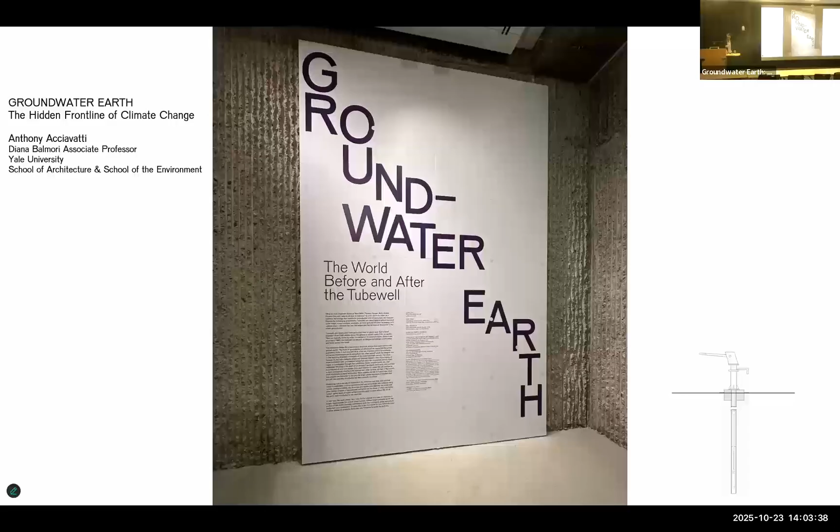As Professor Lal was mentioning, I've spent quite a bit of time doing research in India, across South Asia increasingly, but especially in India, and I'm going to connect it to your backyard here in Arizona as it relates to questions of groundwater. And the work that I'm going to share with you this afternoon, I wanted to show just the team that's gone into making this possible, a little bit like the film credits at the beginning of a movie, because there's quite a lot of work that goes into this in terms of producing not only the drawings and scholarship, but also the exhibitions.

And part of what I do as well is exhibit this work on groundwater and the River Ganga or Ganges. So before I talk about the exhibitions that I have up currently in London, on display at the Wellcome Collection, as well as at the Venice Architecture Biennale, which all of this is part of that work, and why I came to organize an exhibition really around these core samples that I'll tell you a little bit more about, and why I hang them over mirrors.

I'd like to begin with 3 measurements: 80 centimeters, 979 cubic kilometers, and 99%. 80 centimeters is how much the tilt of the Earth has shifted between 1993 and 2010 because of how much groundwater we've extracted from it. 979 cubic kilometers is how much groundwater was extracted in 2018. That's a little over 2 Lake Eries in terms of the amount of water that's taken out. And 99%: groundwater accounts for 99% of the liquid freshwater stock on Earth and is the world's most accessed freshwater reservoir.

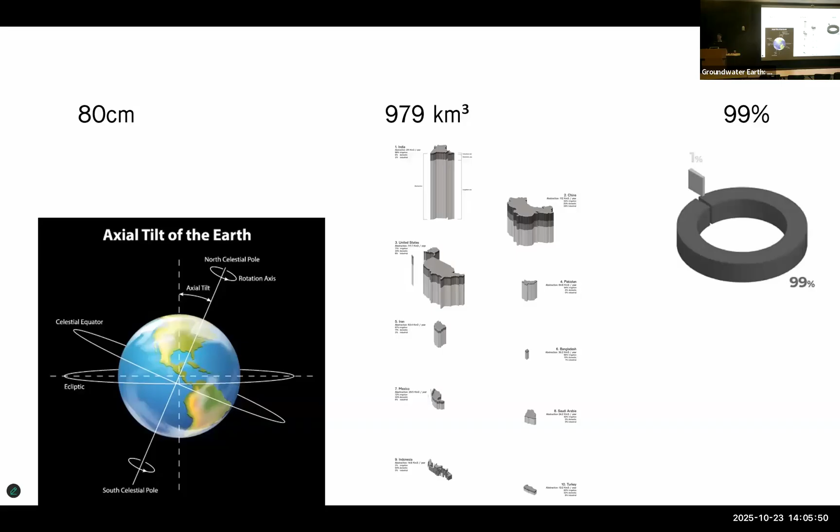And I share this with you because for me, we live in the groundwater age. Groundwater is integral not only to agriculture, but cities and for drinking water. And the work that I'm going to share with you tonight especially focuses on two of the largest places of groundwater extraction, which happens to be India, which consumes more groundwater than the People's Republic of China and the US combined. And then Pakistan comes in fourth. So South Asia, and particularly Asia, is one of the largest consumers of groundwater in the world. And here I'm breaking it down in terms of industrial uses, domestic consumption, and irrigation.

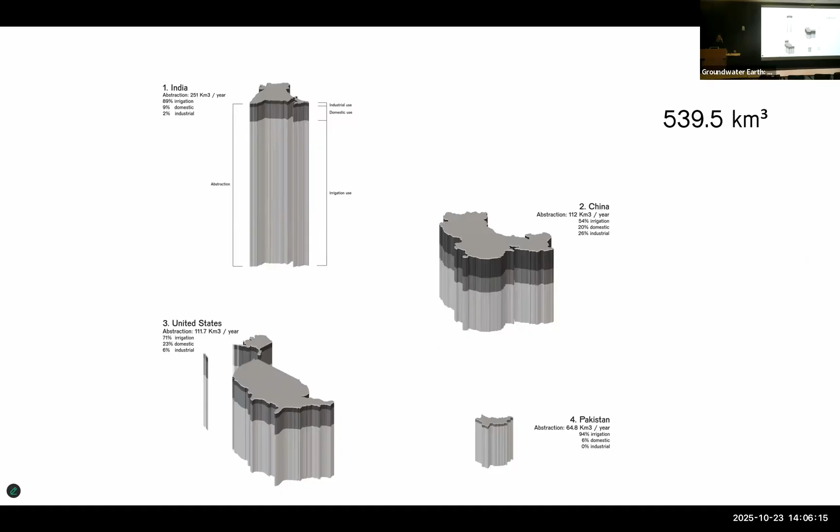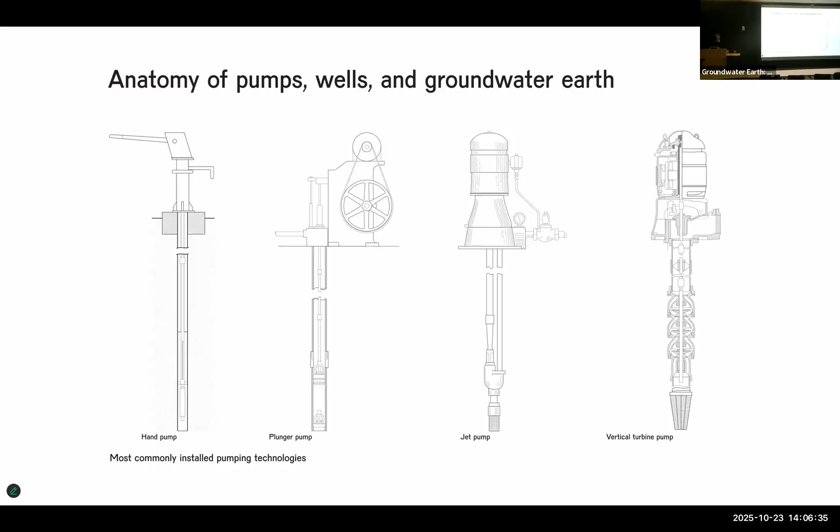And the fulcrum, as it were, that's allowed for this shift to happen and for so much groundwater to be taken out are these things known as tube wells and hand pumps. And it's millions of these instruments that have shifted the tilt of the earth and allow for so much groundwater to be extracted on a daily basis.

And tube wells and hand pumps are commonly used in places where municipal water supply is non-existent, unreliable, or often polluted. These are minor technologies with a global reach. They tap into one of the largest masses of fresh water on the planet, aquifers. And as you can see here, they do so in a variety of ways with different depths, volumes of abstraction and extraction.

And tube wells are typically constructed from perforated steel or plastic pipe, even sometimes bamboo, that's bored anywhere between 1.5 meters and 300 to 400 meters below grade. And they're typically driven by either an electric or diesel-powered engine. And once the water is extracted, it might be consumed at the surface by people, like here, outside of New Delhi. You can see a diesel tube being used.

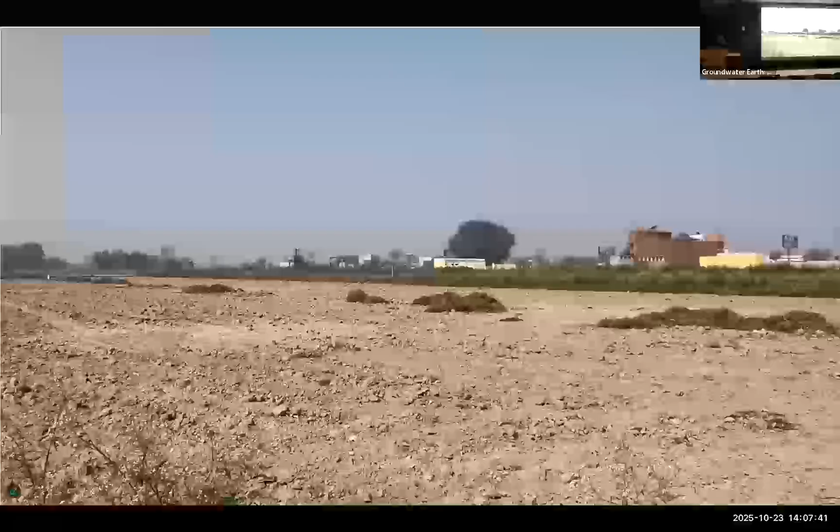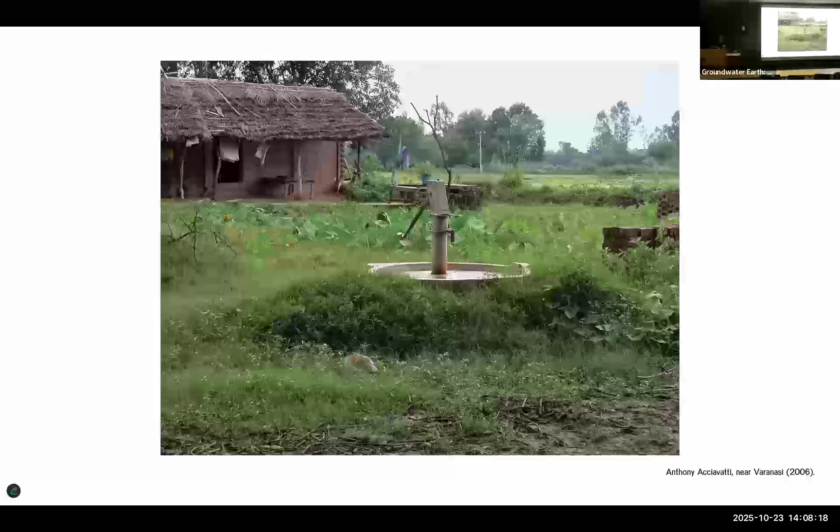You can find cast iron pumps outfitted like this one, unironically with a plastic water bottle attached to it. And certainly in urban environments as well, like this instance of one in Kanpur. So you can see the ways in which it brings animal husbandry together, urbanization. It's used for drinking water, for both water buffalo and people, also for washing clothes. And it might even be distributed like in water tanks, as you see here, which is increasingly being done across the subcontinent and in many other parts of the world as well.

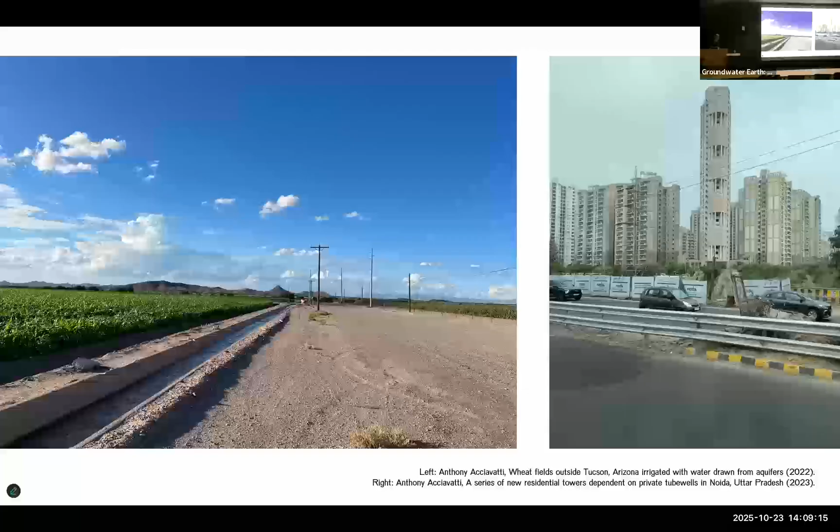And today, nearly half the global population drinks groundwater on a daily basis, and over half of all agriculture is irrigated with it. These devices, as I'll share with you, have allowed billions of people to thrive, but today they threaten to bleed portions of the earth dry. And my contention is the following, that groundwater extraction technologies are as significant to farms and cities as the elevator was to Manhattan in the first half of the 20th century.

And while this has largely been reported as a catastrophe in the making by the media, I'm just going to share a few screenshots from the New York Times about everything from, say, the East Coast sinking to America using up its groundwater like there's no tomorrow. This one kind of surprised me, groundwater being used for chicken wings and pizzas.

Certainly the uncharted waters and those with power thwarting conservation efforts, to policies put in place, like here in Arizona, to attempt to balance urban growth and the availability of water in the face of scarcity and uncertainty, to looking at how, say, Meta's data centers require so much water to keep them cool that they are rapidly depleting aquifers, to looking at where groundwater levels are falling and rising globally, all of which is critical and important. But I would say most of this is not focused on how this plays itself out spatially.

So this afternoon, I'm going to largely speak about understanding hand pumps and tube wells, along with their owners and users, as reshaping space, both agriculture and cities. And I've weighed in on this in my own way a few years back when I penned an op-ed on the need to consider space and time as factors for replenishing aquifers, for urban growth and agricultural production, with, again, a focus on shaping space.

And my work certainly builds on a body of scholarship that ranges from, say, B.D. Dhawan's work in the 1970s to Dubash's work on tubewell capitalism and the formation of institutions around this, mostly in the context of Gujarat and Western India, to rural economists like Tushar Shah, who looks at the ways in which tube wells redefine social systems, mostly in South Asia,

to Arid Empire by Natalie Koch, who I believe will be speaking tomorrow here at the university, and the ways in which we have technological transfer between, say, the state of Arizona and Saudi Arabia. And I've been, in effect, writing for some time now and published bits of it, a biography of the tube well.

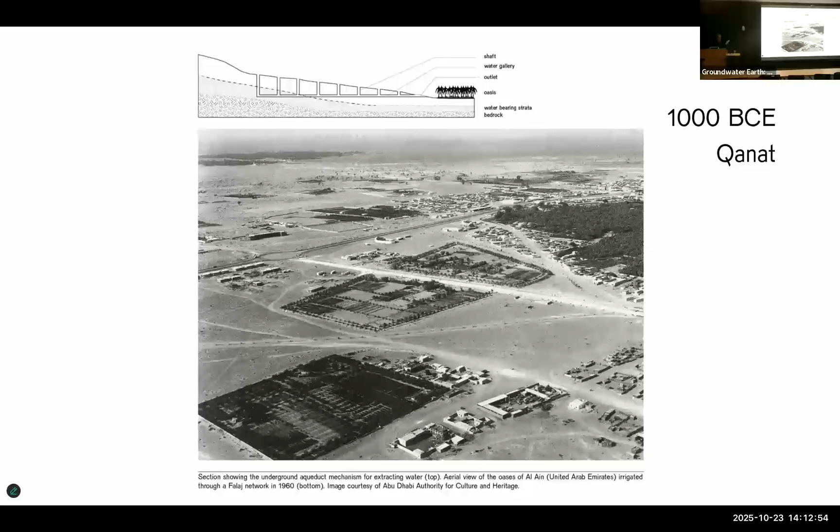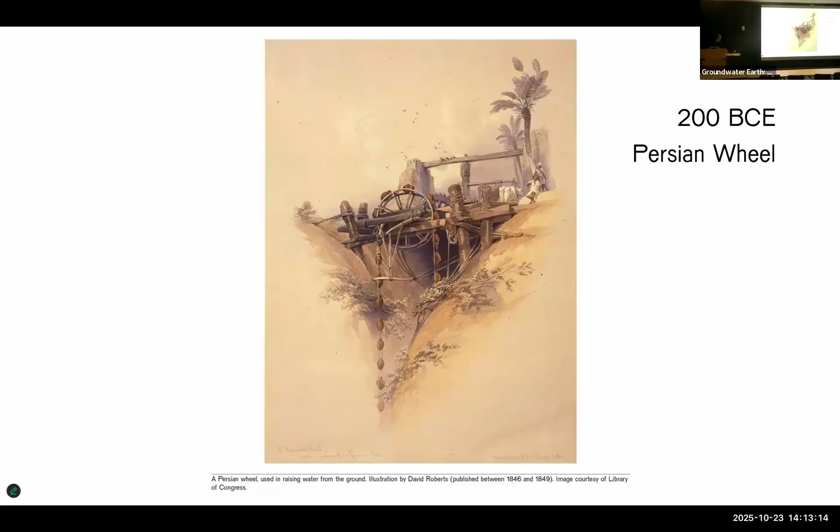To say the Persian wheel, which most likely came to the subcontinent over 700 years ago, but was developed in 200 BCE as a way of drawing up groundwater using a bullock to pull up water with the Persian wheel that you see here to irrigate crops. And certainly we find even still to this day Persian wheels and mots like you see here to, again, draw up groundwater.

And the portability of the tube well, coupled with industrialization in the 19th and 20th centuries, along with the murky codification of groundwater rights here in the Americas and Asia, made them well suited for military campaigns and for areas with little or no surface water bodies.

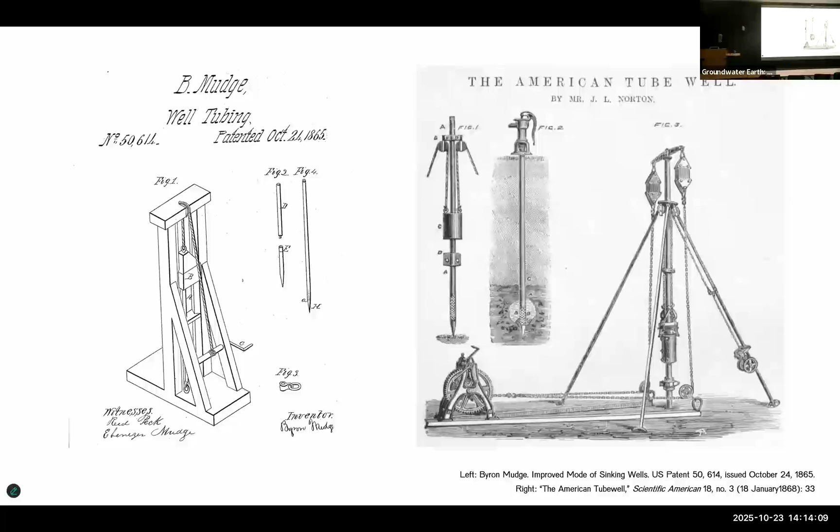And because of my interest in understanding this condition spatially and over time, I've been drawing the different kinds of configurations of pump technologies across the globe and placing them in relationship to agriculture and urban growth. So these are just kind of 10 instances of different spatial relationships to tube well technologies.

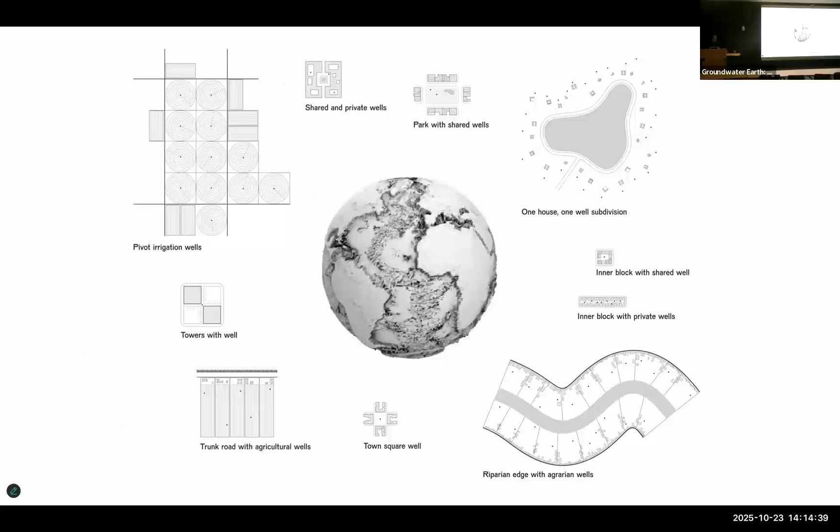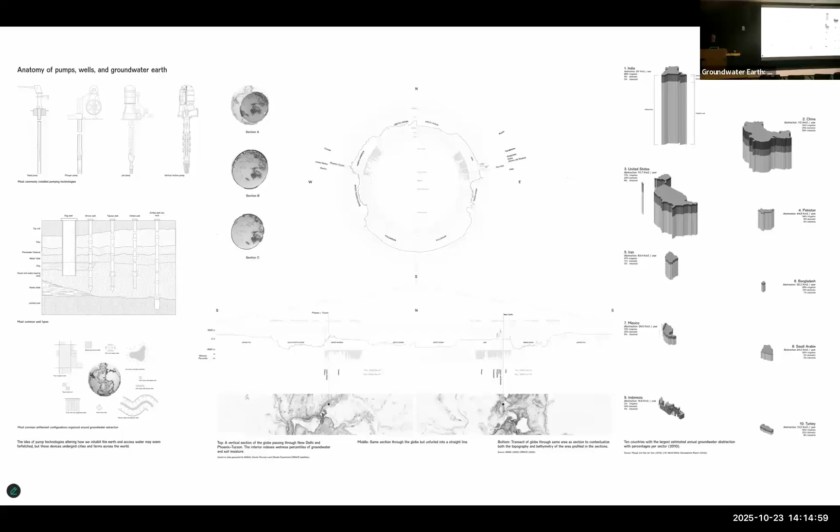Oops. And so these drawings examine tube wells and hand pumps as lenses for observing this largely invisible yet critical infrastructure that I would define as groundwater earth, which is that portion of the Earth's invisible hydrological cycle that undergirds global agricultural production and urbanization. And what do I mean by that?

Well, in 2002, the Gravity Recovery and Climate Experiment, known as GRACE, was launched. It's composed of 2 satellites orbiting the Earth, and it's really the first opportunity to directly measure groundwater changes by space. And by observing changes in the Earth's gravity field, scientists could estimate changes in the amount of water stored in a region, which causes change in gravity. And so monitoring these changes allowed scientists to visualize and calculate the size and volume of water in aquifers.

But to give you some sense of the level of resolution, most satellite imagery we get is like 30 meters to the pixel. This is 230 kilometers to the pixel. So it's incredibly low res in terms of what it provides, but it gives us a sense globally, and it's still very much used for climate modeling.

But what I'd like to do is imagine if we don't so much picture the globe in terms of its different gravitational poles or conditions, but instead, what if we were to empty the globe of its surface water bodies, a little bit like what Thomas Burnet did in the 17th century, and instead of doing it to try to show the veracity of Noah's flood, instead to better understand the relationship with topography and bathymetry.

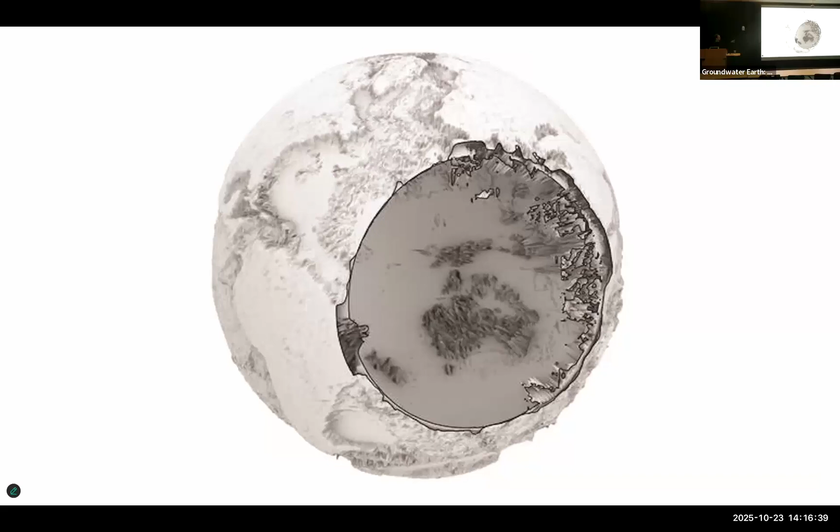If we do that with this globe, I can then take the satellite imagery that's provided by GRACE, and I can start to map out the relationship between aquifers in terms of volume and density to the topography and bathymetry of the globe, so that I can better understand this relationship between the surface and subsurface of the planet.

And this modeling took about 2 years to do just because of the double curvature. But I take sections through then 2 of the major sites of extracting groundwater, here in the Sonoran Desert and in the Indo-Gangetic Plains that you can see here on the right-hand side.

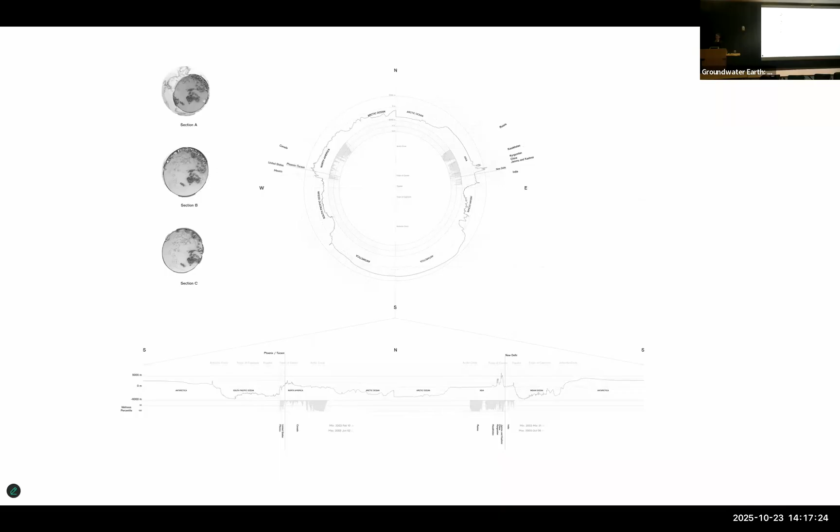And I do all of that so that I can do models like this that's currently in Venice of the Earth's aquifers, and here are North America's aquifers in relationship to the bathymetry and topography of the globe. So again, inside and outside.

And I focus on these two places that have contributed mightily to those three measurements that I mentioned to you before of 80 centimeters, 979 cubic kilometers, and 99%, which is again the Indo-Gangetic Plains and the Sonoran Desert. And this work is the outcome of nearly two decades of fieldwork and archival research, where I've moved like a sinusoidal wave between fieldwork and archival work to build these models.

And if, as the historian Swati Chattopadhyay argues, urban forms have a direct correlation with infrastructural norms, then in the absence of nature and the state, cities and towns, as well as farms and homes in the Indo-Gangetic Plains and the Sonoran Desert, share similar patterns of water extraction.

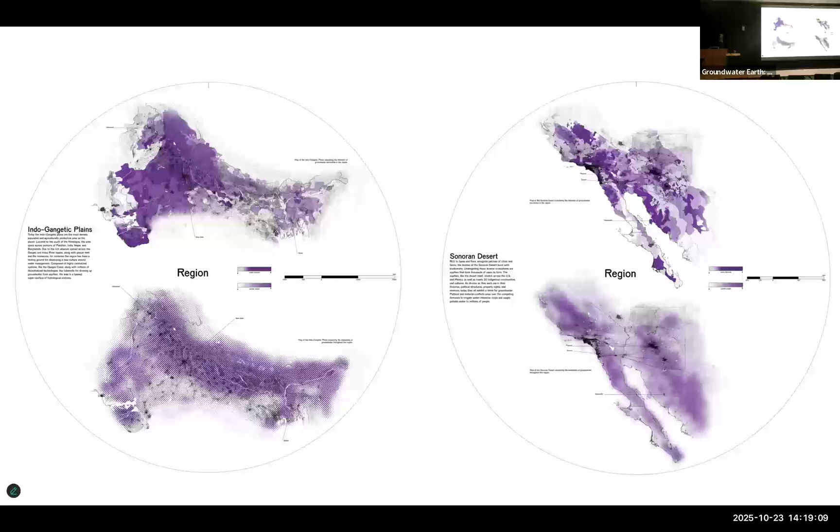As two of the world's most intensively pumped landscapes, these regions can tell us a great deal about how people use tube wells to tap into the larger global commons of groundwater resources that are not only unevenly distributed, but also unevenly accessed. And before I do that, let me fill in a little bit of the backstory to tell you why I've spent the better part of these past two decades trying to see like a mudskipper, which is pictured here. These beautiful amphibious fish can live on land for days on end.

And what's more, they move between wet and dry, hard and soft conditions. Indeed, they're mud-loving creatures that have inspired a lot of my work that I'll share with you today. And they not only move between these areas with ease, but they have evolved so that when they are above water, they see clearly like we do. Whereas when we submerge ourselves, our vision becomes wavy due to how water refracts light differently than air. But mudskippers continue to see clearly below or underwater as well as above.

And this kind of double vision can teach us a lot about how to not only reckon environmental uncertainty, but also incorporate it in our work as stewards of the built environment. And hopefully they can assist in seeing beyond barren dichotomies like hard and soft, wet and dry, land and water, groundwater and surface water.

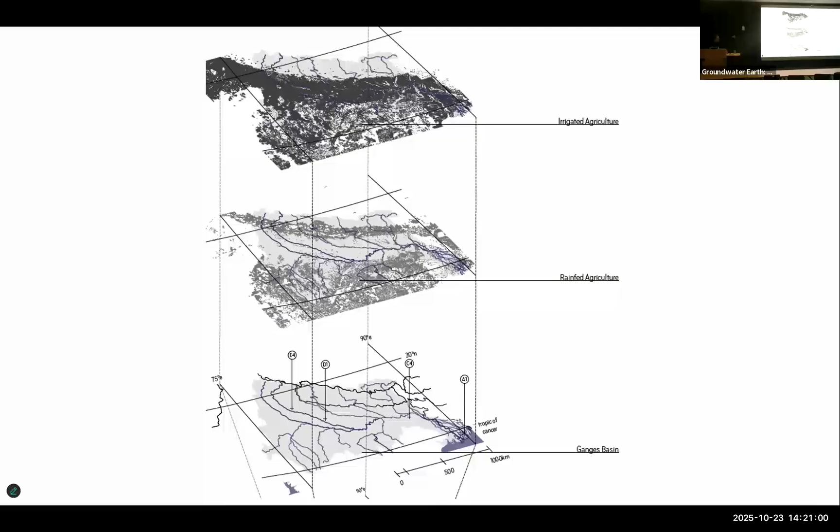So as Professor Lal had mentioned, I spent a decade seeing like a mudskipper to create a dynamic atlas of the Ganges River Basin. And I'm not going to try to shoehorn that work in tonight, but suffice it to say that the principal argument is that imagine I take the footprint of the river, the watershed, and I tilt it at 45 degrees. I then look at all of the rain-fed agriculture and all of the irrigated agriculture, like you see here. It is like a vast hydrological supersurface. There's no other part of the planet that has that continuous kind of irrigation like you see there. And so it's a hydrological machine.

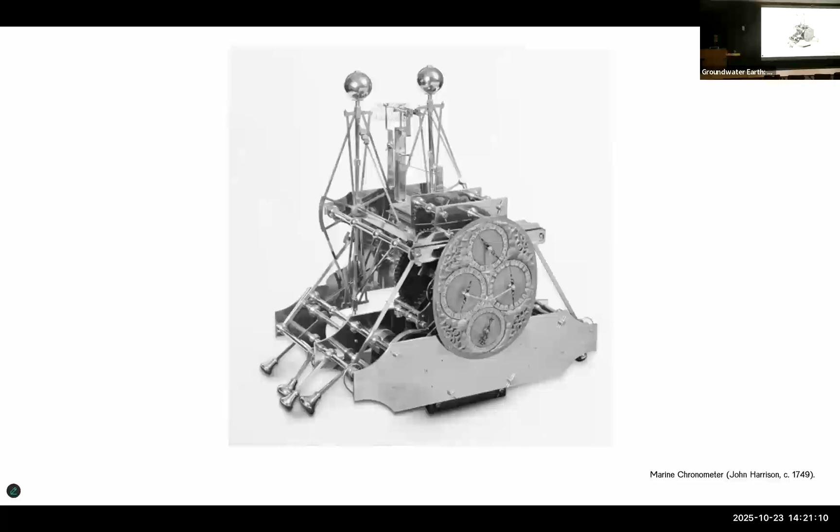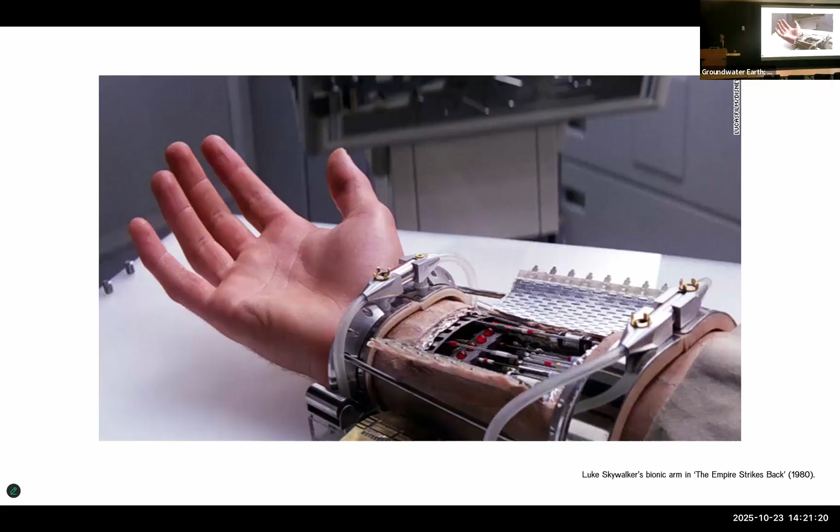But this hydrological machine is less like a device, like say a chronometer that's pictured here that was used to establish longitude. And instead, it's more like Luke Skywalker's bionic arm in The Empire Strikes Back. Is it a technology with a biology, or is it a biology with a technology? So I'll share with you some mud-loving moments that epitomize the virtues of seeing like a mudskipper, which means attending to this substance here, silt.

Ever since the subcontinent collided with Asia 50 million years ago, trillions upon trillions of tons of silt have been shed from the ever-growing Himalayas. So these tectonic crumbs, as it were, are part of the process of understanding this basin and why it's become such a space for agricultural production and groundwater extraction.

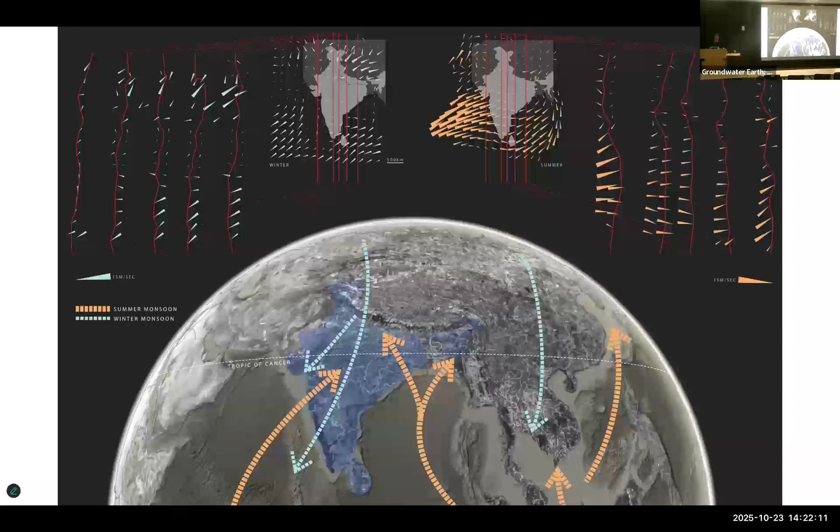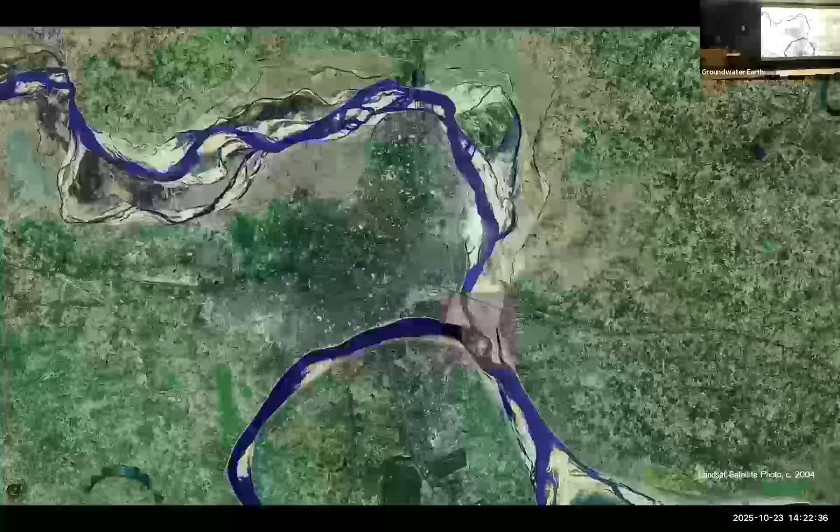And it's located at a major site for Hindu pilgrimage, as well as a major artery in terms of historic transportation. And I know it's a little hard to see here, but the waters to your right are blue and the waters to the left are brown-gray. And while this looks like it's 2 water bodies coming together, it's not.

It's 2 geological provinces coming together, because the Ganga River is fed by sediment from the Himalayas, whereas the Jamuna River, the blue, is fed by the Chambal, which has a very different sediment load. So this is what makes these 2 rivers have these 2 different colors that one finds oftentimes in the ways that they're pictured. But it's, again, the bringing together of these very different tectonic crumbs within this site, which has shaped this landscape for so many millennia.

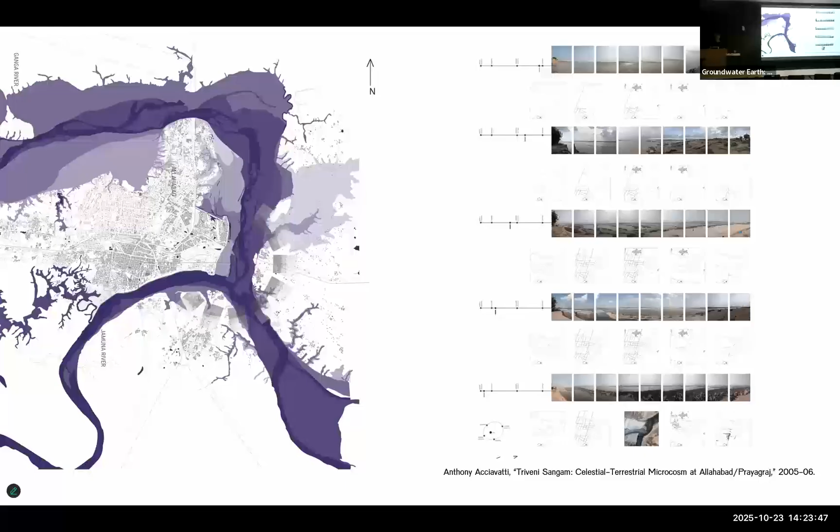And the drawings of the confluence and its environs that I'm sharing with you here combine cartography and photography to capture the cyclical rhythms of the monsoons over the course of a single year. So what I mean by this is this drawing shows how surface water bodies like riverbeds, lakes, and ponds expand and contract over the course of a single year due to the monsoons.

Observing these slow motion changes is crucial to understanding the urban form and urban life of the city and its environs. The lighter tones of violet are when the surface water bodies swell with the monsoons, and the darkest tones are at their shallowest and thinnest.

So throughout 2005 and 6, when I first moved to India, I visited the confluence every 2 weeks, where I snapped photos like you see here to create a panorama, to be able to better understand how this area goes from arid and dry to wet and gelatinous silt every year. And these panoramas complement the slow motion changes that I shared with you of those tones of violet. So where I'm documenting those things cartographically from above, here I'm doing it photographically.

And so this set of panoramas is during the month of Magh, from Magh Mela, which is a festival where 2 to 3 million people move into a temporary tent city. We have water, like plumbing, we have electricity, toilets, there's temporary hospitals. And this space is inhabited for 45 days.

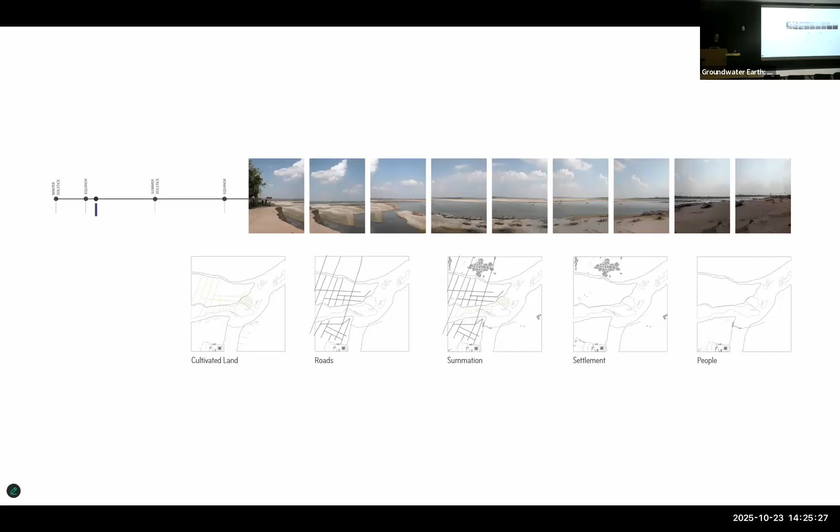But when the festival ends, the outline of the grid remains tattooed on the sandbars and shoals, and farmers move in to sow crops and harvest them. So in other words, the banks and sandbars are transformed from this hyper-dense urban to agrarian space in less than 2 weeks' time. The farmers harvest their crops. The monsoons arrive, eroding the sandbars and shores, and completely wash away the ground. This process of urban to agrarian repeats every year.

And it's definitely the most intelligent use of space that I've ever seen in terms of how people incorporate the deep rhythms of the monsoons. And here, these are then all of those panoramas and drawings put together, and they've made their way into documents like for the UN as a way that you might start to draw the biophysical, but also sacred geography, social, political layers of a city.

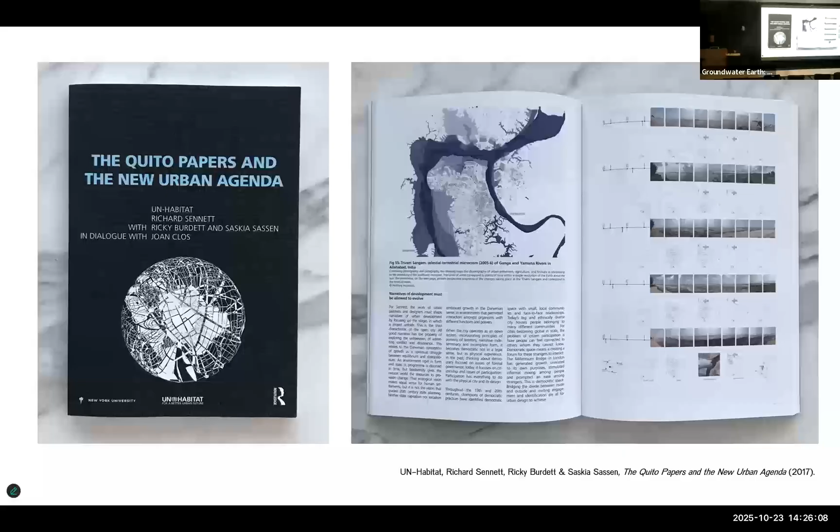So these drawing processes, I would argue, provide a blueprint for how to build on these deep rhythms of the monsoon, a process that I think more and more parts of the world would benefit from with climate change and greater environmental uncertainty.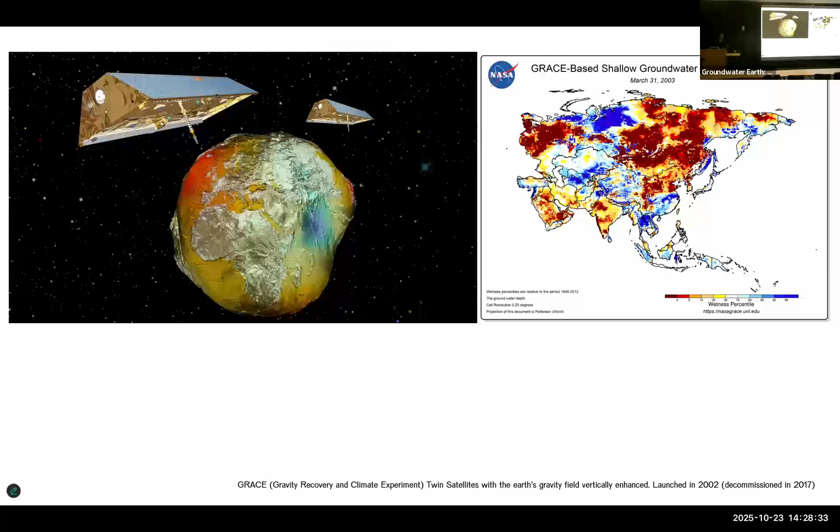Google Earth had just gone live. Drones existed, but were mostly being used by the Bush administration to surveil or assassinate people. Satellite imagery existed, as I mentioned to you before, but really low resolution. So all I had was a really clunky Garmin eTrex GPS and an even clunkier Nikon camera to try to map out this watershed.

And when I got to India, I had hoped that I would find contemporary maps. And I would ask, and these were oftentimes the best that I could find from the Survey of India, which were usually tracings of maps from the 1950s and 1960s. So effectively, it hadn't been carefully mapped or surveyed comprehensively in over half a century.

And when I would ask if I could see maps, people would oftentimes say, well, why, are you CIA? And I don't know anybody who would say they work for CIA. I certainly haven't. But so I had really no other choice if I wanted to carry out this work but to walk the land.

So I went from Gangotri Glacier, which is about 3,800 meters above sea level, through the Gangetic Plains, taking about 25,000 photographs, a near continuous panorama of it. And seeing like a mudskipper also led me to making my own instruments, which were prosthetics that I would wear.

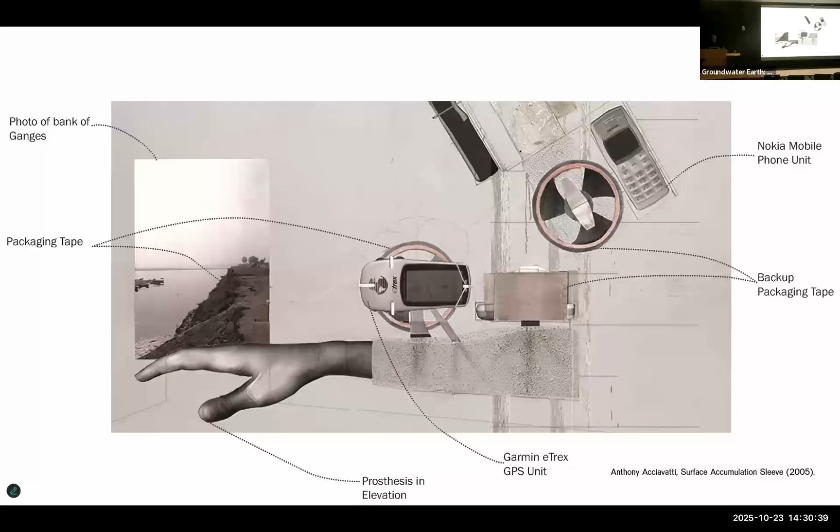So because it hadn't been mapped in half a century, I developed guerrilla tactics to measure these changes through devices like this surface accumulation sleeve, which is a prosthetic that one wears on their right arm to map soils. It's equipped with that clunky Garmin GPS system that you saw, as well as rolls of packaging tape, so that, just to say, when Spider-Man shoots his web from his wrist, I shoot packaging tape from my arm to collect soils. And I do that perpendicular to the river edge, like you see here, to collect these soils for a kilometer.

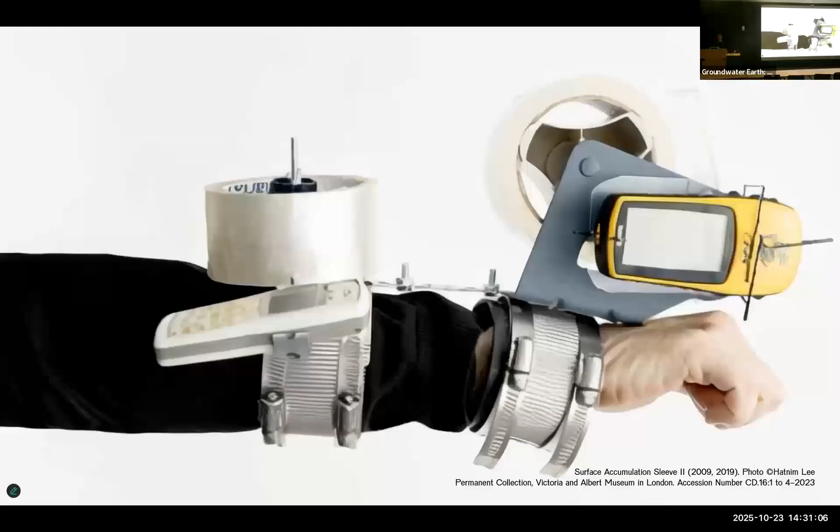And here you can see the way that I exhibit this instrument in Seoul. These are using Walking Dead figurines because they were the right scale to do these kinds of dioramas. Or here a close-up of that instrument that I made in order to do this. Using this thing in 45°C weather is quite arduous, so I developed different versions of it that were a little bit more comfortable. And also then using a kind of radio antenna as a hoe to pat down the tape.

And then even reconfiguring a child's remote control car into a surface accumulation rover, tricking it out like you see here with packaging tape, torch, camera, and a lot more to do this work of collecting soils to map out this area, which also doesn't hurt one's back as much.

Then along with these rolls of tape, which get very big and collect so many things, I also developed what I call a Ganga dip sock, where I bought 100 pairs of white cotton tube socks and would thrust them into the river all along its banks from Gangotri Glacier up in the Himalayas to the Bay of Bengal as a way to collect soils. I would then geotag them and dry them off, like you see here.

So that when I went through customs, and if I got asked, well, why do you have all these soiled socks? I would just say that I was a filthy backpacker that didn't have time to do my laundry, as a way of bringing these soils in and managed to get them past government officials to do this work.

But if I bring you back to this tape as a way of looking at the soils, the tape that, along with it being like Spider-Man's web, it's a lot like Katamari Damacy, if any of you know this PlayStation game from 2004, where small objects like spoons and paper clips adhere to this little orb for this prince that's trying to build a new galaxy or a new set of planets. And so eventually jungle gyms start to stick to this, and even entire cities collect, and city blocks and stadiums.

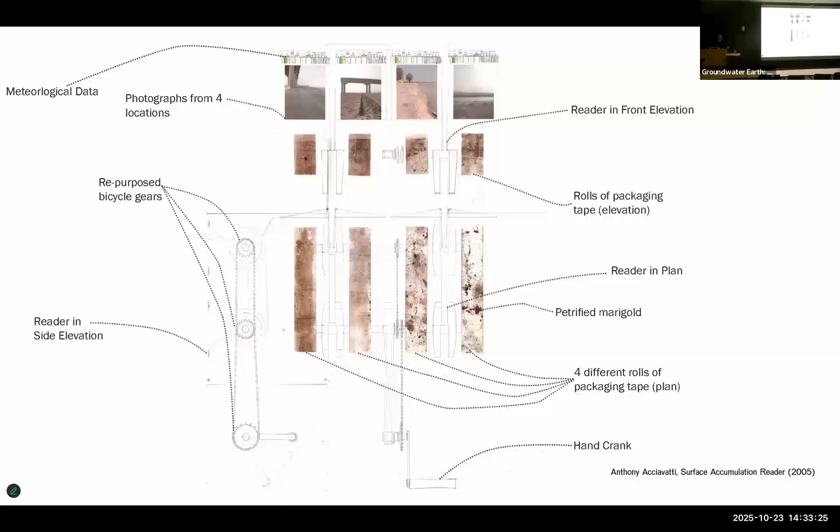Well, my strands of tape, they collect soils, but also flowers, fecal matter, plastics, auto parts, and many other things. So these artifacts from human and non-human occupation allow me to conduct an ethnography of the soil. Using the wrong thing for the right purpose defines most of my work with water, soil, and urban form. And seeing like a mudskipper then means using these devices to be able to move between the space of the laboratory and the space of the field.

And after scanning many hundreds of kilometers of packaging tape, I didn't have any instruments to analyze the soils. So I turned to that trusted Photoshop tool, the Magic Wand. Now you might use the Magic Wand to, say, digitally impose a tattoo on someone's chest. But I misused the Magic Wand tool to break down particle sizes. And here again, using the wrong thing for the right purpose allows me to make my own remote sensing device when no data is available.

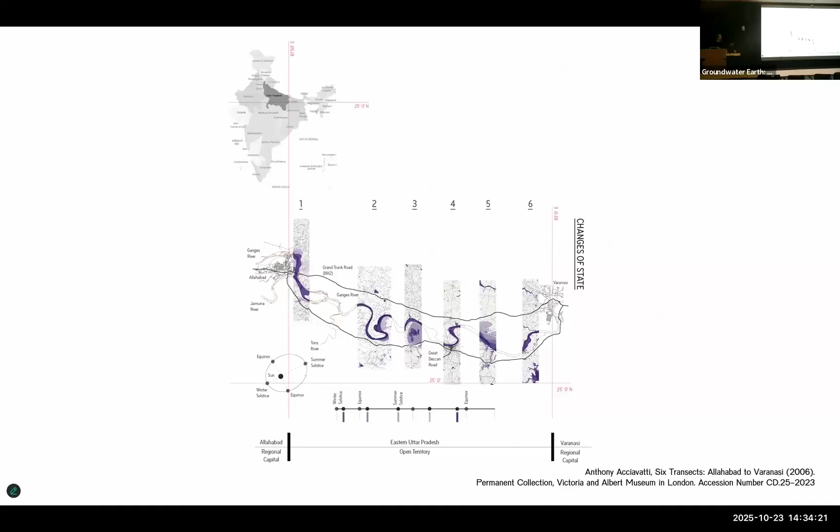So here I'm breaking down the different sediment sizes because those particle sizes tell you about the behavior of the riverbed and flood channels that I look at. And that's what then allows me to make much larger drawings of the watershed, not just of the city of Allahabad, but these transects, like you see here, where again, I'm able to plot out those tones of violet and dark violet and light violet by using these instruments.

So I always like to think of these drawings in fashion terms. If most cartographic drawings are customized, say like something you get by Christian Dior, they're like couture. Mine are more like ready to wear that you get at Uniqlo or Target because they have a seam allowance. So you can gain a few pounds, lose a few pounds, they still fit. So these drawings are not outdated by the time they're done because they take into account surface water and groundwater conditions in relationship to urban form and urban growth.

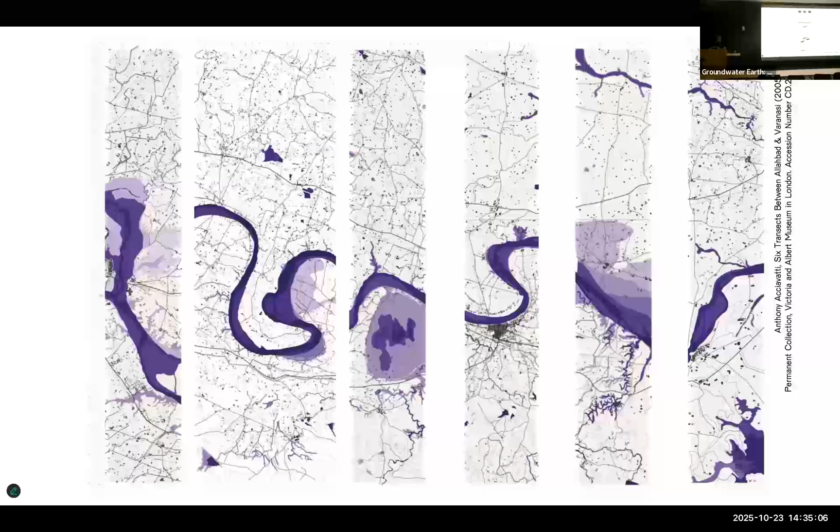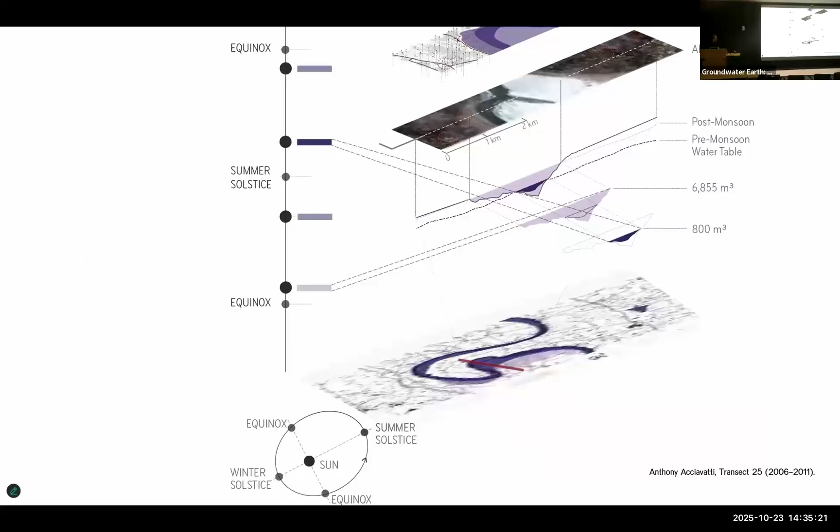And they allow me to not only then look at, say, the surface, but also subsurface. So I start to take those and understand the relationship better between the surface water in the river channel with the groundwater and aquifer, like you see here, mapping out then the different layers of water extraction by tube well, urban form, cultivation or fields, all the way to the cropping patterns that one has in different fields. So it's quite transscalar in what I can do with it.

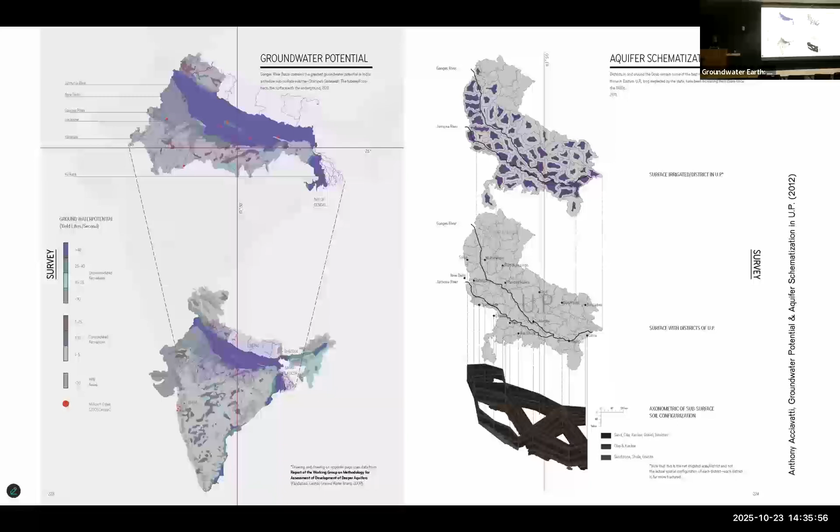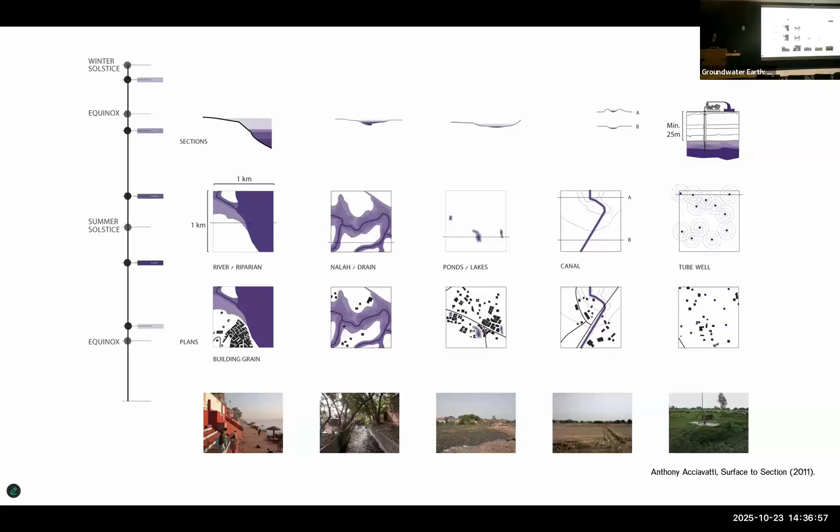And there's a reorienting that's happened across this area from thinking of the surface to the subsurface. And what I mean by that is that this is a drawing that goes from river all the way to tube well on the right-hand side. And you can see that we go from very dense to much less dense with the tube well, because the tube well allows people to effectively domesticate areas for agricultural production, but also urbanization, and not have to stick so closely to surface water conditions, whether those are rivers, canals, etc. So it allows for a diffuse kind of urbanization to take shape.

And I look at the history of the tube well in a much longer time frame that I won't go into depth about. But I think what's important to note is that this was initially developed in 1865 in the United States as a military technology, patented because there was a concern by Union soldiers that Confederate troops in the American South would poison surface water bodies.

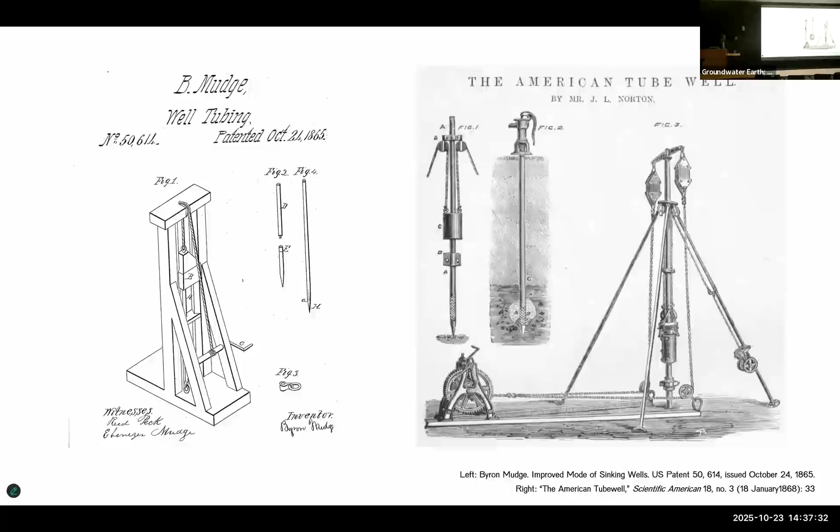So this was a military technology for drawing up groundwater. It's eventually adopted in the UK by this gentleman by the last name of Norton, who uses it for agricultural production and brings it to all of these agricultural shows in the UK. And eventually it's used in the Abyssinian desert in modern Ethiopia to draw up groundwater for a British expedition in the 1860s. And I share these moments with you because it's traveled from the US to the UK to Africa.

It eventually makes its way to the subcontinent, where it's used and then is oftentimes spoken about as the Abyssinian tube well because of its health benefits. It's not exposed to any atmospheric influences, is the way that they would describe it in the 19th century. And it gets profiled in the Lancet, Scientific American, as this scientific engineering technology.

Now, it's important, though, in the context here in Arizona, because, as many of you probably know, in 1898, there was a court case that came before the Arizona Territorial Supreme Court regarding the ownership rights to an allegedly well-defined subterranean stream that ran beneath a person's property a little bit to the north of Sedona. And the claim was that someone purchased land from someone who had been using tube wells. Their neighbors were using tube wells as well, and even drilling more tube wells.

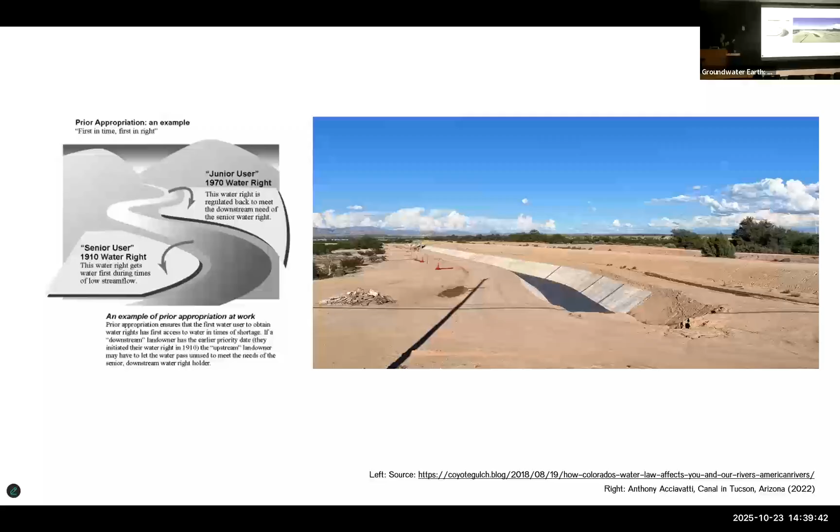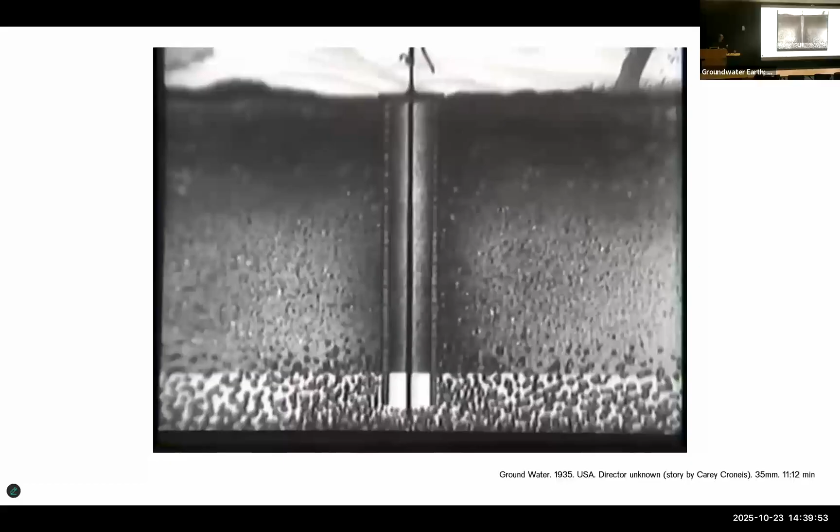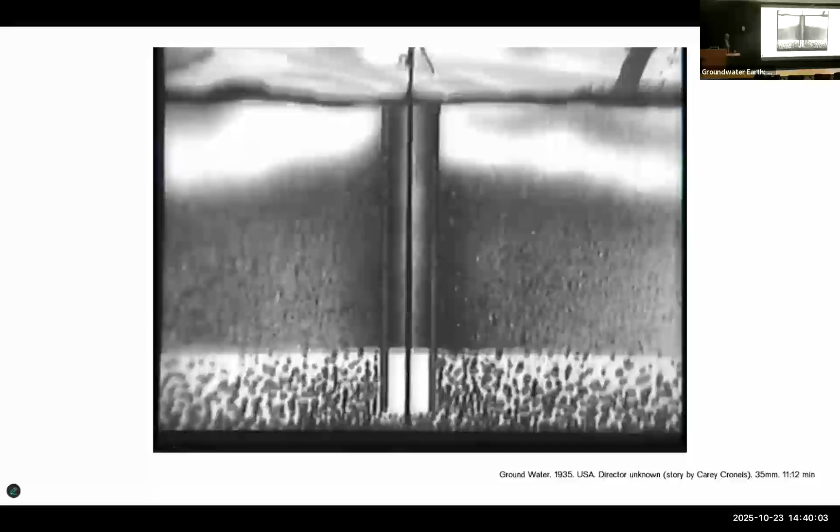And in short, the argument was that the subterranean water was the same as a surface water body. But in fact, when it goes to the Supreme Court, they uphold the decision of the Arizona Territorial Supreme Court, because what they see and what they describe is this. They say that groundwater is not recognizable like a surface water body because it percolates and oozes from the ground. It is therefore a constituent part of private and not...

As both an architect and historian of science, because that has a lot to do with how we draw and define groundwater. So this is a film from 1935, during the Great Depression, to describe the relationship between surface water and groundwater. Yeah, groundwater as being a part of property.

This is changing in other parts of the world, and certainly you obviously have your AMAs here that I'll talk about in a moment. But while Arizona is developing its system of groundwater extraction, we have the longest canal system in the world, the Ganges Canal in the Indo-Gangetic Plains. It's about 12,000 kilometers long today, with a very large central water bureaucracy. This canal system was developed in the middle of the 19th century and continues to grow even to this day.

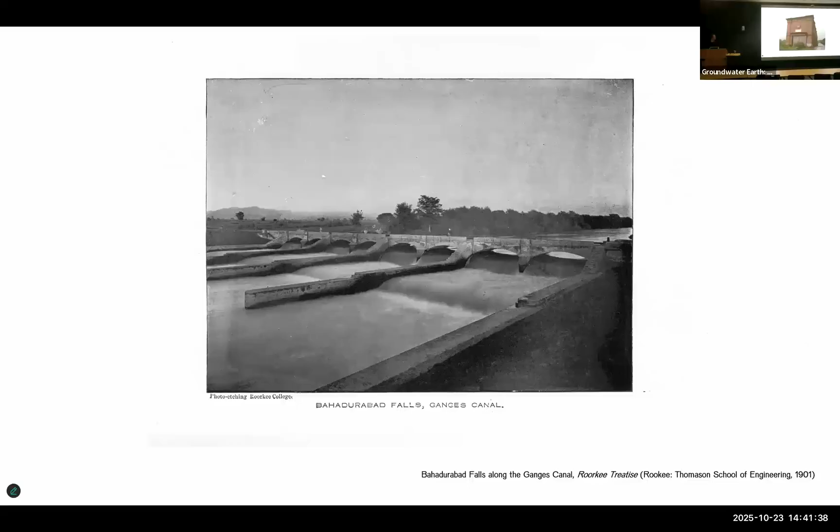But in the 1930s, the artificial falls of the canal system are outfitted with turbines to power electric-driven tube wells. And it was to power about 88 villages, about 600,000 acres with 1,500 tube wells. And these buildings still exist, mostly as sites where people scrawl their lovers' names or donkeys hang out, like you see there. But it was an attempt to bring together energy and agricultural production, to monitor and oversee agricultural production in the Indo-Gangetic Plains.

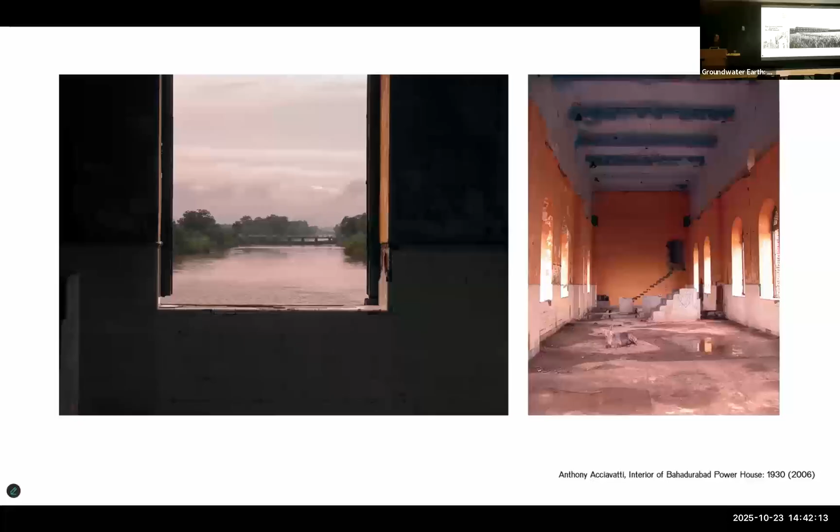But here in Arizona, you have a much longer history of this with your AMAs, or active management areas. And I'm obviously not going to be that person that comes and tells you about your place and the Groundwater Management Act of 1980. But I think suffice it to say, this civil code that develops recognizes that groundwater should be understood as something as shared as the air we breathe.

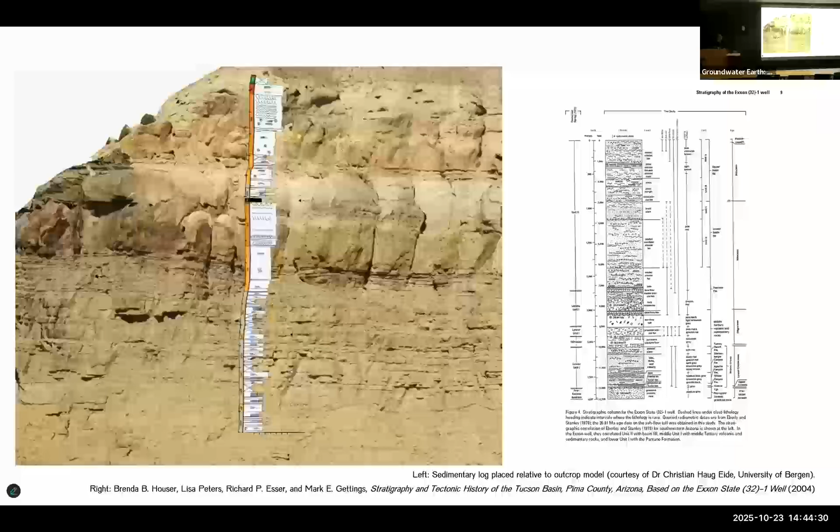Well, the work then that I do is to try to not just see in plan, but also to better understand these conditions in section. So I try to see a little bit like a geologist does in terms of the stratigraphy, like you see here. I do that as well, but I do something a little bit different.

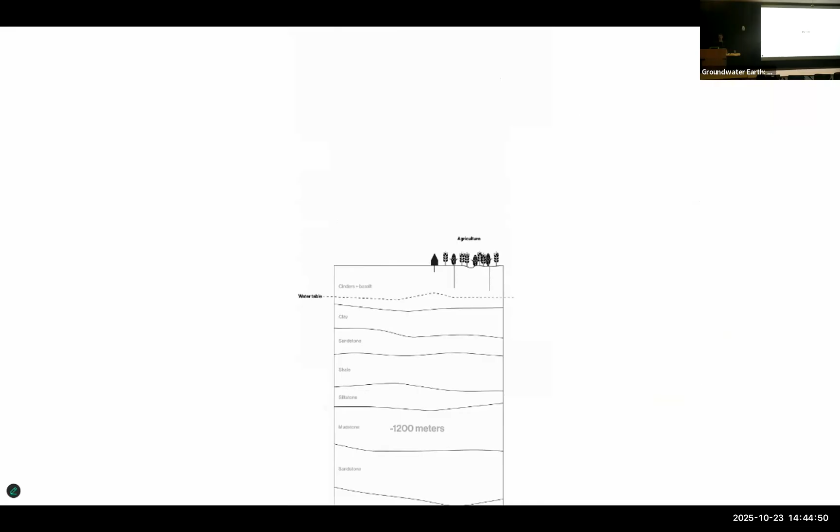Produce, but it obviously drops water table levels. You see that it then... so it's in tension, and I put mirrors underneath it, like you see here, so that we understand that this is a major protagonist in shaping how we terraform this.

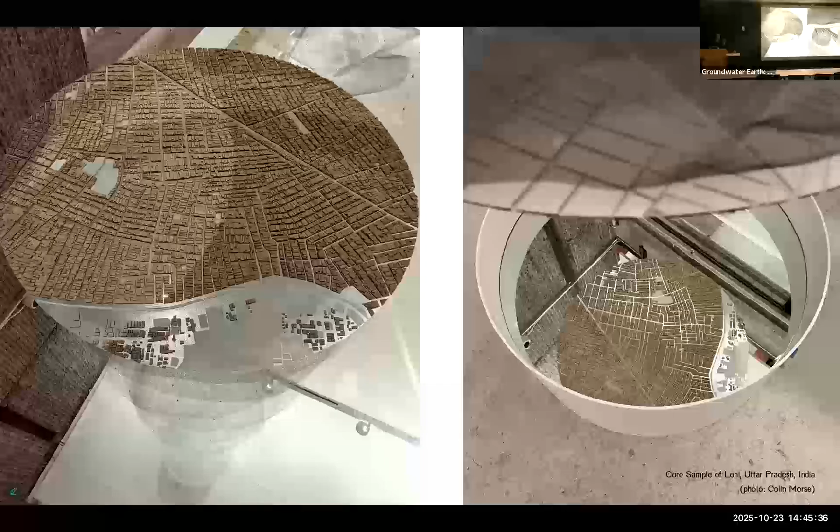So when you come to the mirrors, these things that look like Pringles here, those are those strata that you see here. When we come to the mirrors, we can see reflected in them the surface to better understand the ways in which we terraform by extracting so much from the subsurface. So you effectively look down to look up, and you look up to look down in the exhibition.

And I do that at four scales. I do that at the house scale, the neighborhood, the city, and the hinterland scales. And I do this always looking at a core sample here in the Sonoran Desert and in the Indo-Gangetic Plains.

So for instance, if I take the scale of the house, I want to share with you two houses, one that was built in Flowing Wells here in Arizona, not terribly far, just next to Tucson, and another house that was built in New Delhi around the same time. And both these houses incorporate tube wells and wastewater management as an essential domestic infrastructure. And by bringing these two technologies into the domestic sphere, the home no longer relies on any centralized water management system, and allows for a greater flexibility in terms of location.

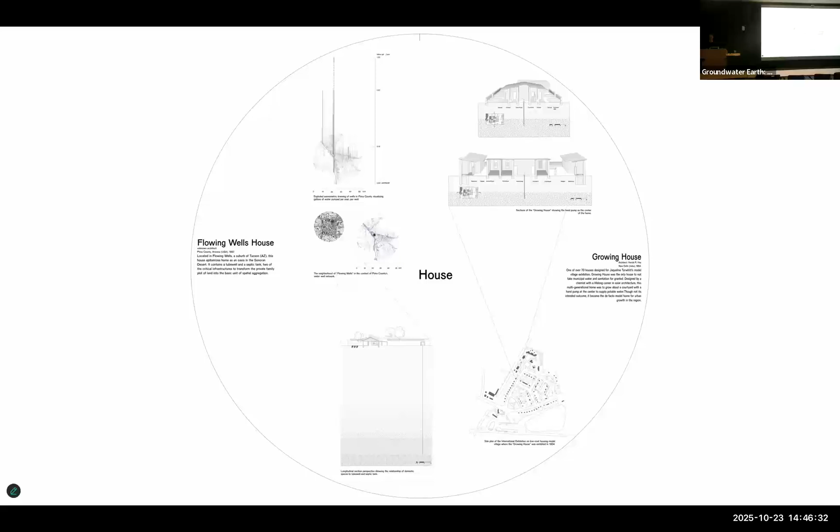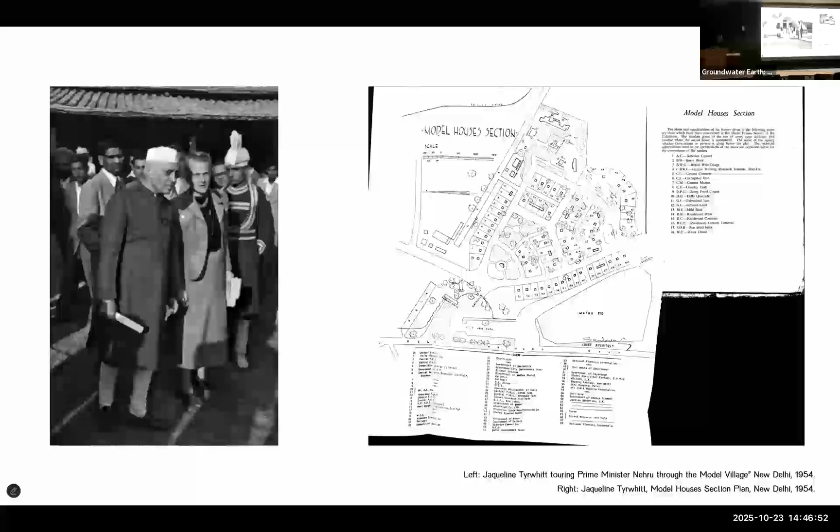So let me begin in New Delhi. This is the first Prime Minister of India, Prime Minister Nehru, and then this is Jaqueline Tyrwhitt, a South African planner who is brought in by the United Nations to design a model village. And there are over 100 model houses that are built here for this village. You know, houses like this, where you have kind of a barrel vault, or even this one that was made by the asbestos industry in India at the time.

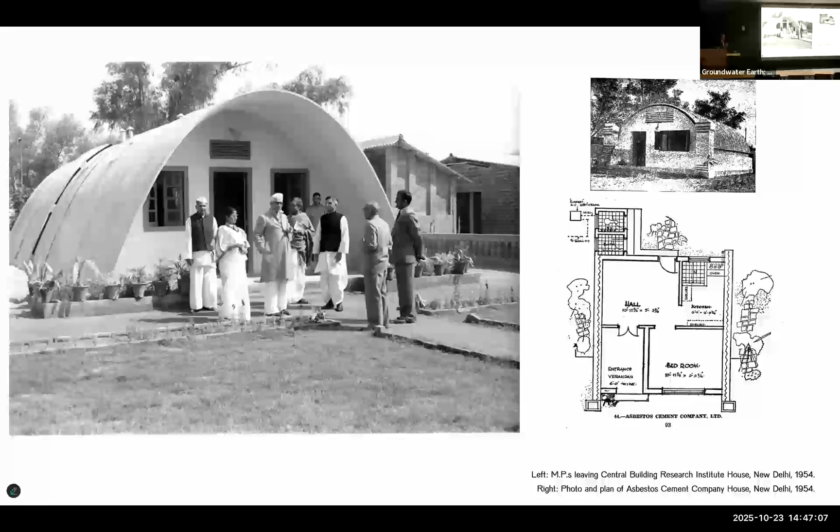But none of these houses recognize where water will come from. They all assume it will be through a municipal system, except one, which is the growing house that was designed by a chemist that worked for Monsanto for many years and then is employed by the Indian government. And he designs a house where there is a hand pump in the center, kitchens flank the house, and then we have here multi-generational family housing that develops always around this courtyard with access to the hand pump.

And so you can see in this section here how it's at the center of the house. And here it's also taken into account keeping the animal husbandry, the mangers, and the bathrooms as far away from the hand pump as possible, so you don't have wastewater infiltrating into groundwater. But effectively, it allows the builder of this house to create their own oasis.

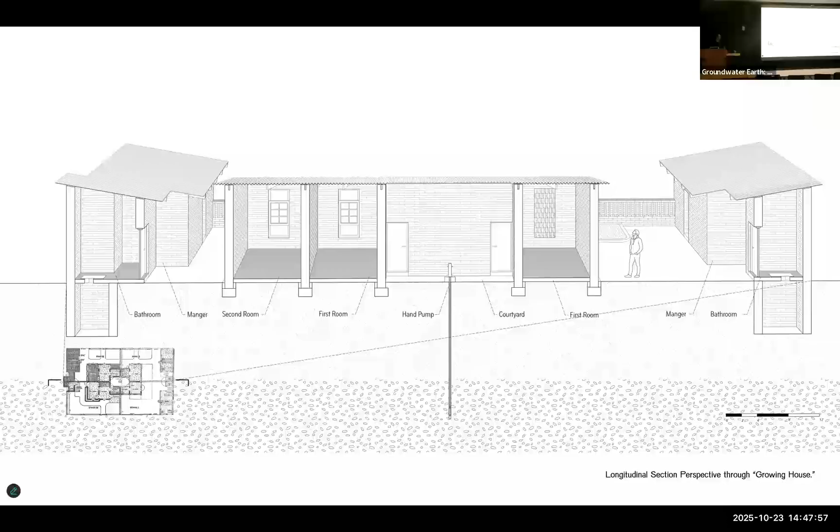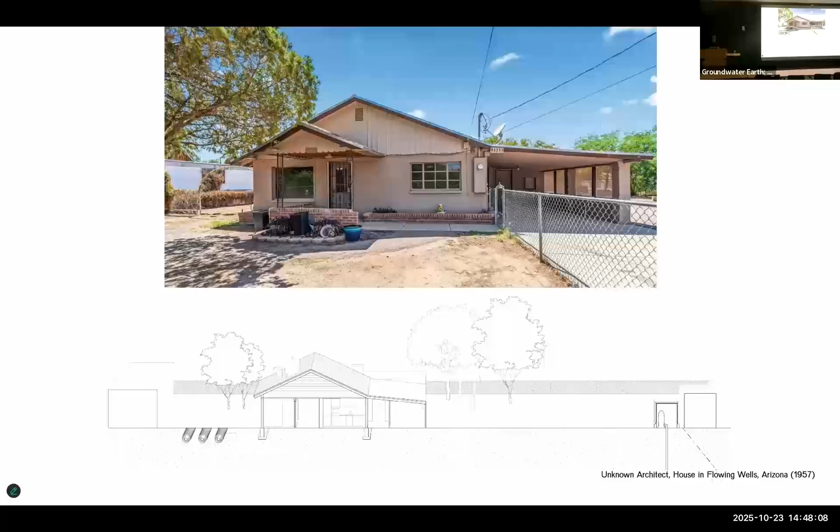Now, this same kind of pattern exists here in the Sonoran Desert. So this house that was built in Flowing Wells around the same time, in 1957, has a tube well and is outfitted with a septic tank so that it too might function as an oasis. But of course here, the tube well goes much deeper. And here you can see the septic tank within the neighborhood of Flowing Wells where it's located. So very similar patterns of spatial aggregation around the extraction of groundwater.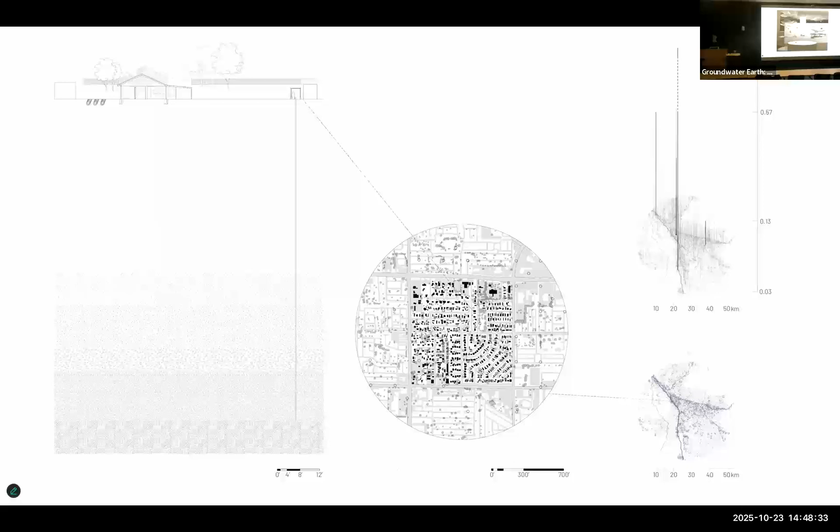And so I then hang those two models of the houses in relationship to one another to understand better groundwater here in New Delhi versus groundwater here in the Sonoran Desert.

And I do this also at the scale of the neighborhood. So of course you have Winter Haven here in Tucson, which was designed to look like Shaker Heights in Cleveland, Ohio. Has anybody ever been to Winter Haven before? There's a very big Christmas light extravaganza that happens here.

But to me, what's more amazing is that they created a neighborhood municipal water supply, a cooperative, so that they could irrigate their lawns to always be green year round. So this is the edge of Winter Haven and non-Winter Haven here, where you can see the desert floor butts up against the grass. There's obviously an aesthetic project here, but there's also a sense that this is a community shared resource.

I'm not advocating for doing this kind of lawn keeping, but at the same time that this was being developed here in Arizona, Loni, which was a town of 4,000 people in 1961, is today over 500,000 people. And it survives, originally supposed to have a similar tube well system like Winter Haven, but instead has over 14,000 hand pumps, mostly in public places along streets and open areas, to supply groundwater for drinking for these 500,000 inhabitants. But when you have so much buildup of impermeable surfaces, the groundwater level is dropping. And so we have hand pumps going dry in these areas at the neighborhood scale.

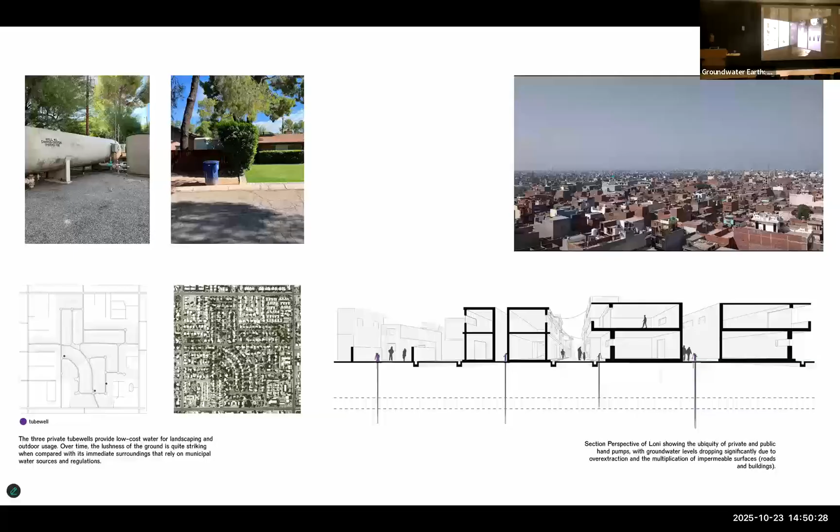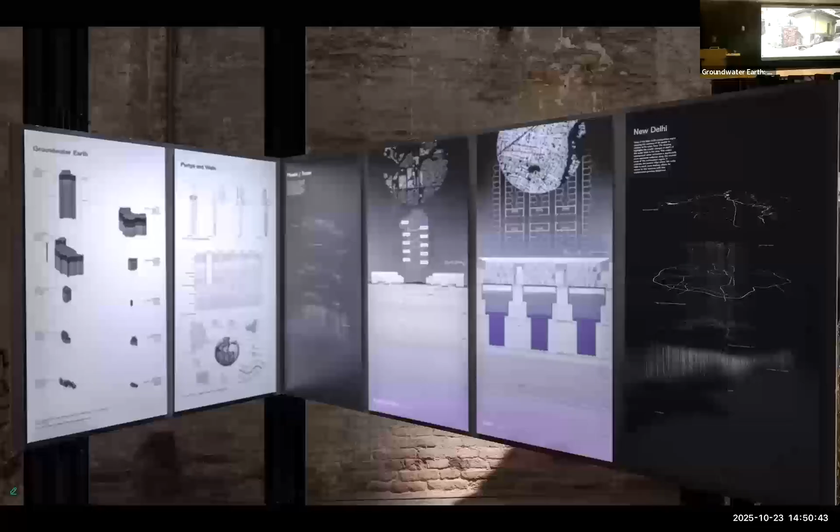And so I've developed two projects that I'll speak briefly about that address these issues in both these locales to think better about how do we conceive of groundwater as a collective civic infrastructure. So in the context of Loni, where we have that buildup of impermeable surfaces, you can literally see that they're overtaking even the hand pumps here in terms of all of the brick and building that's being introduced. And it's quite a densely populated neighborhood.

This is then a satellite image drawn in figure ground, where white are the buildings, black is the open space. I introduce a micro infrastructure that's here, here, here, into this area in this figure ground, which is effectively introducing a covered roof that you see here, because there's an incredible amount of heat island effect here, introducing then across 3 city blocks new schools, clinics, and shops that are very much needed, and then this open space here.

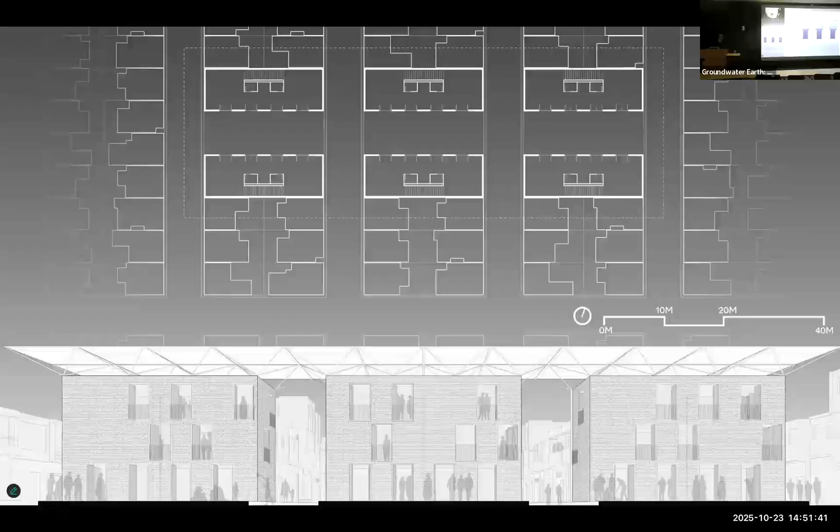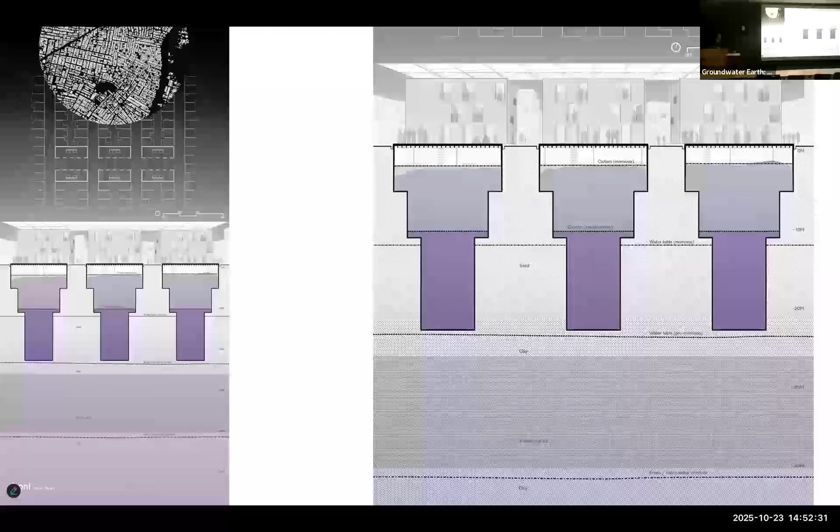But beneath these blocks is a very large system of cisterns that are designed to collect rainwater. So instead of everybody having their own hand pump or bore well, all of the rainwater is collected from the roofs of the neighbors in the block, and we then will artificially recreate the groundwater cycle using sand in these cisterns to collect that water to better keep it for public use in each of these blocks, and also so that it doesn't get wastewater infiltration along with all of the heavy metals and microplastics that are now in this soil here. So here, using architecture to transform groundwater into a public good and a public space under a single roof, and doing this in different areas of the neighborhood.

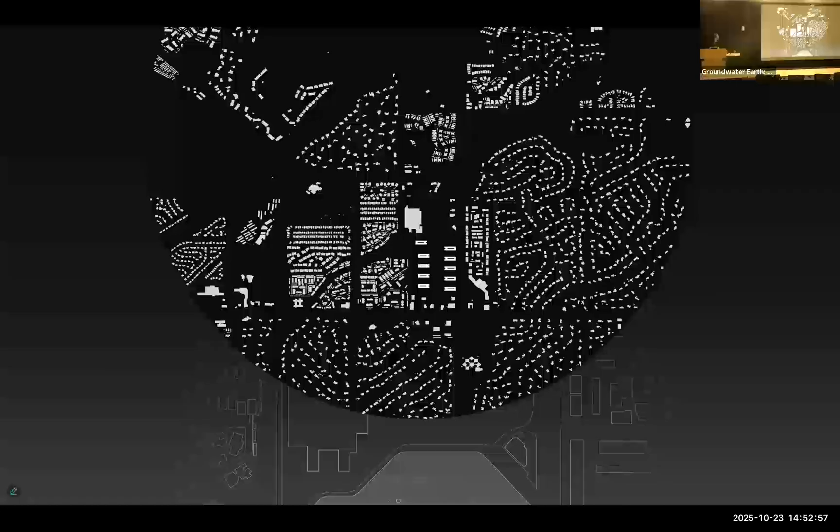In the context here then of Tucson, I look at the Foothills Mall, which is oftentimes spoken about as a dead mall because it's been abandoned and now torn down, many parts of it. And I look at this mall because it has an incredible amount of surface parking area that you see here, and of course also experiences inundations and droughts. And how might we then transform these large spaces of capitalist consumption at a mall into a larger collective infrastructure?

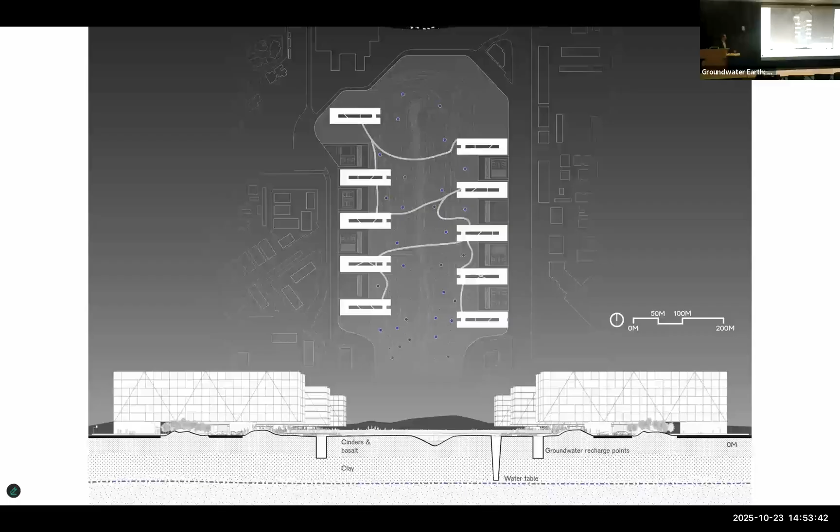So here what I've designed is effectively a very large park that would collect all of the runoff and rainwater, with housing along its edges and recreation here. The housing tiptoes over this much larger area for artificial groundwater recharge, transforming this area of large-scale parking and consumption into a larger common good that could be replicated in other places. So I share these with you not as finalized designs, but as provocations of what could be done, of how design could bring an understanding, again, of how we better incorporate the subsurface to shape the surface of the planet.

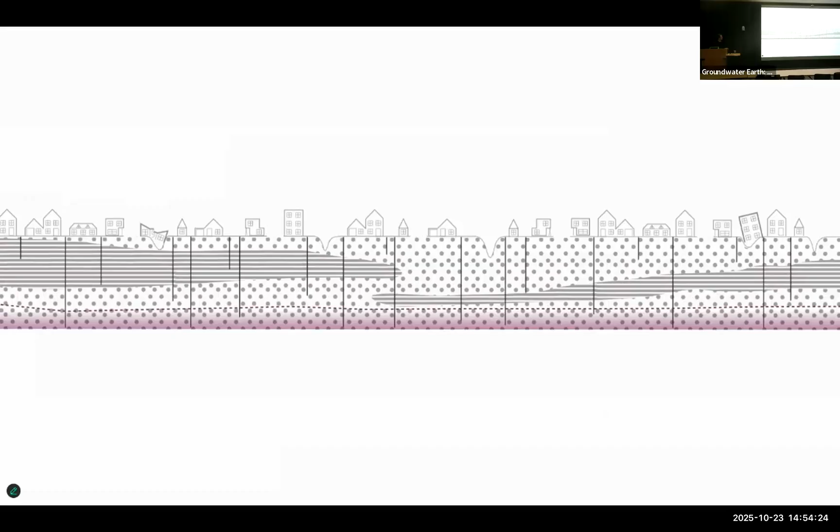What we get... develop like these that I know you all are so familiar with, that happen because of the extraction of groundwater. And this is very much like a tornado or a hurricane. It does not care what's public and private land, yet it raises all kinds of questions because of mostly atomized private extraction of groundwater about who's responsible for repairs to buildings, who insures these spaces. So it raises larger collective questions because of our thirst for groundwater and how it plays itself out.

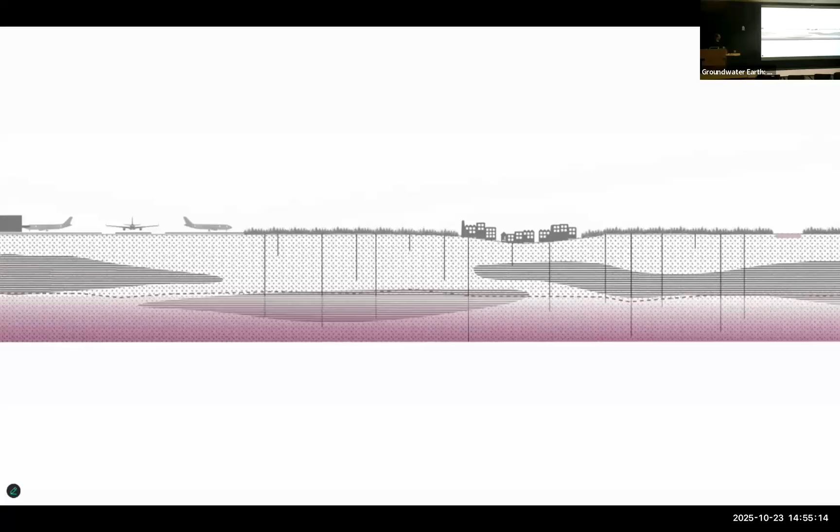In the context of a place like New Delhi, this is next to the... on the airport because the runways are also sinking as a consequence of both the planes and the consumption of groundwater. So we also have sinkholes that develop too.

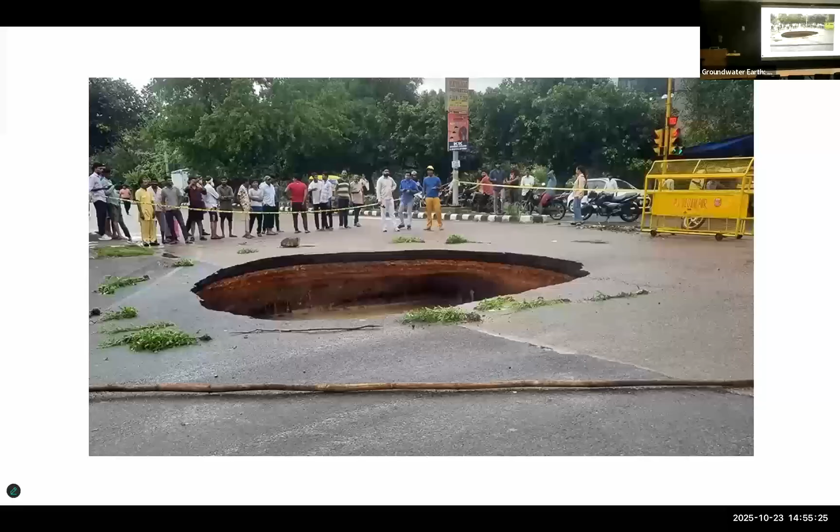At the larger regional scale, the hinterlands bring together how underground water can be understood in the battle between greenfield urban development and agricultural uses. In the case of Phoenix and Tucson here, new urban development has consistently replaced agricultural land. And in the case of New Delhi's periphery, new large-scale urban projects coexist in a dramatic juxtaposition with agricultural uses.

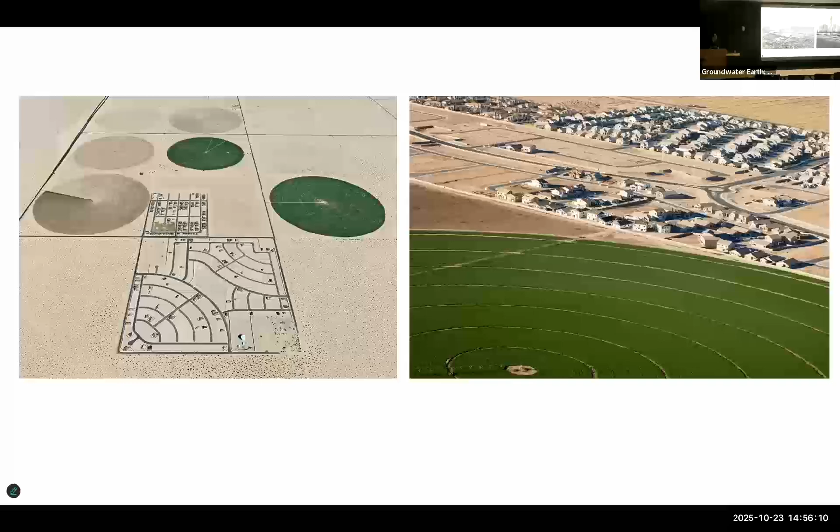So of course, you all know this quite well with the pivot irrigation, the 1785 Land Ordinance, or the Jeffersonian grid, as it's called, in terms of how that plays itself out of these kinds of development butting up against pivot irrigation, like you see here. And in the context of, say, New Delhi, we find in a place like Noida, just outside of it, tall towers cropping up alongside agricultural plots due to the value of real estate, all of which relies on private tube wells. So in an attempt to make sense of these conditions, I make portraits of cities.

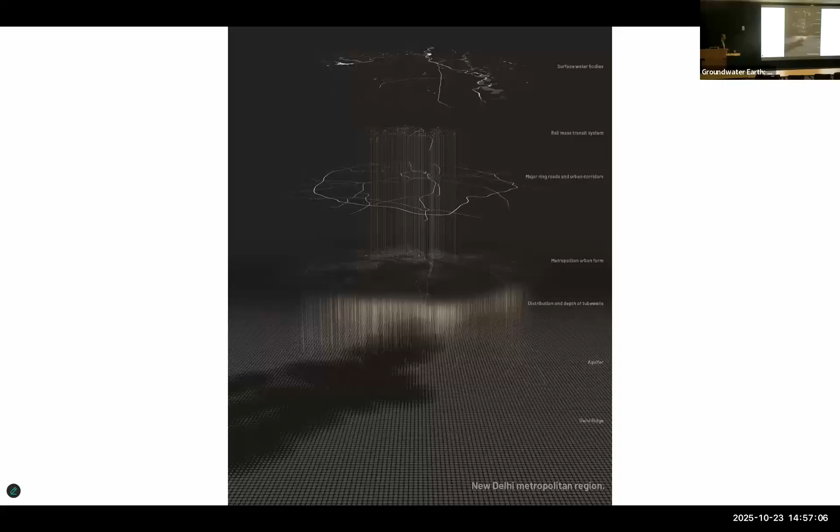So this is a portrait. See the city? City. Here you can see it a little bit better. You can see that this is a much larger collective infrastructure than that ring road, than that metro, yet we don't think about this as a public infrastructure, supporting so many millions of people through these millions of tube wells.

And here you can see that a little bit closer. And of course, the depth of them on this side is different than this side because of the Delhi Ridge and the kinds of soils we have here versus over here. And here again, then better kind of foregrounding those conditions.